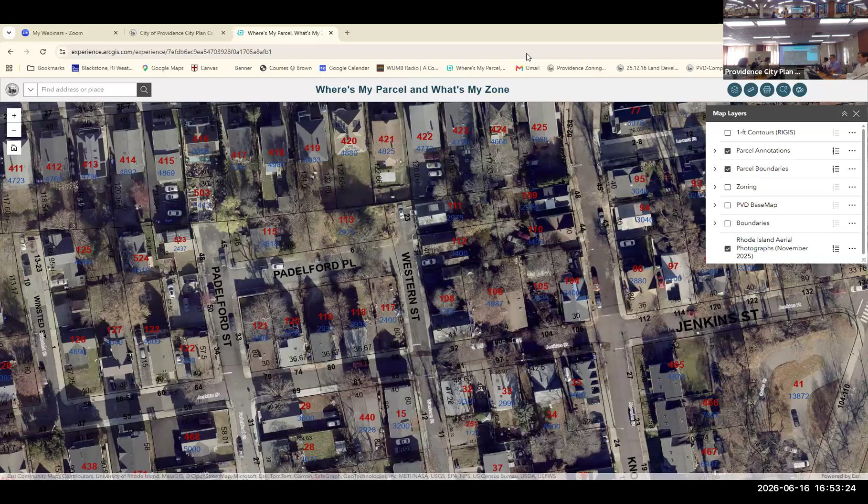Hello, thank you for your time today. My name is Sandra Slonim and I live at 23 Western Street, been there a while. The northern terminus dead ends literally in front of my house, my front door. I also own lot 113 right across from me. I'm asking the city to abandon the northern terminus so that I can have legal access to a parking space for whatever's left of my lifetime here, because anybody can go and park there and then I can't get into my house. So, that's it. Any questions?

It's funny, Google Maps has Padelford Place as Western Street also, but it just curves around. Yes, that's incorrect.

Simon was so very helpful with me. Those two lots, where it says Padelford Place, 50 years ago were removed and Padelford Place became a street. However, the update didn't make it to the tax assessor's map. Well, the good news is that's the tax assessor's map, and that static map will be updated after the end of the tax year.

Thanks to Nate Urso, the signs are up. I just want to say that everyone I encountered at City Hall and in the planning department, from Joe Angelino to Nate Urso for the signs, to Lev, to Craig Hockman, to my city council rep Sue Andebois, were so helpful with this. I'm sincerely appreciative. That's really great. We don't often hear that, so that's good to hear. Yes, yes.

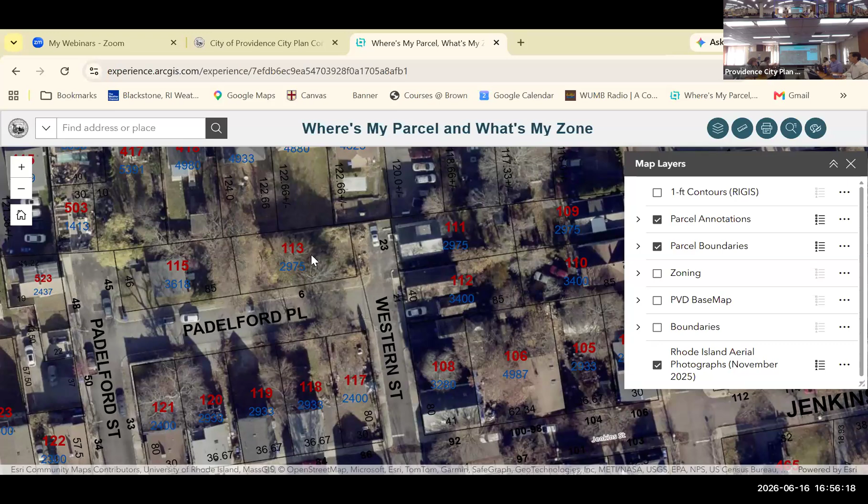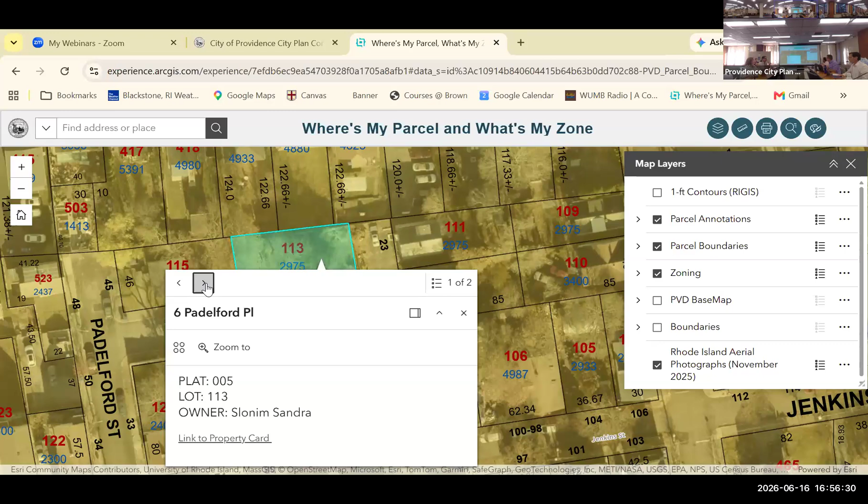And that's an R3, I believe this is R3 zoning here. And you have spoken with the owner of lot 113, correct? That is me, yourself. Oh, it's you, so you have no problem getting the authorization to do this from the other landowner.

No problem with that. The other one is a very unique situation, the one above it. There is a lot to the north, but that clearly has street access, the southern terminus of Duncan Avenue. Have you had any contact with that? Yes, that's my neighbor Yale, and I've told him what I'm doing.

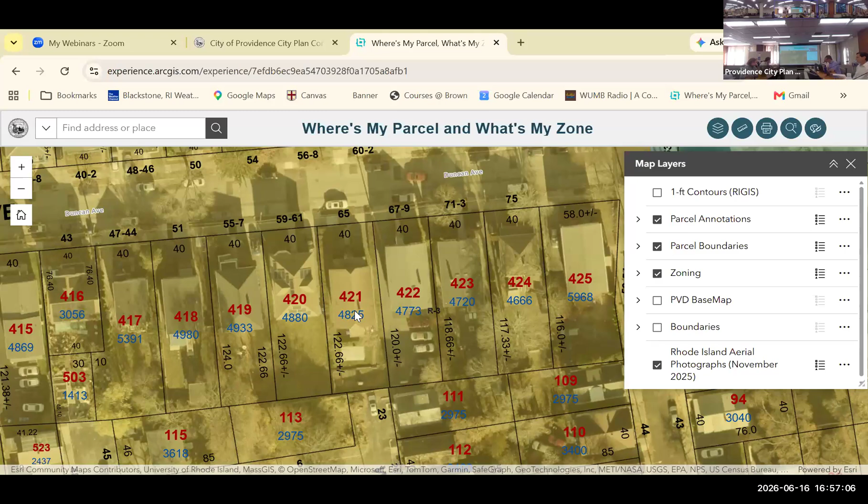Any other questions for the applicant? Let's hear the staff report. Commissioners, as has been discussed, this portion of Western Street is only useful for providing access to property owned by the petitioner, and not necessarily for accessing different parts of the city. So therefore, we feel that abandoning it would not necessarily go against the public interest.

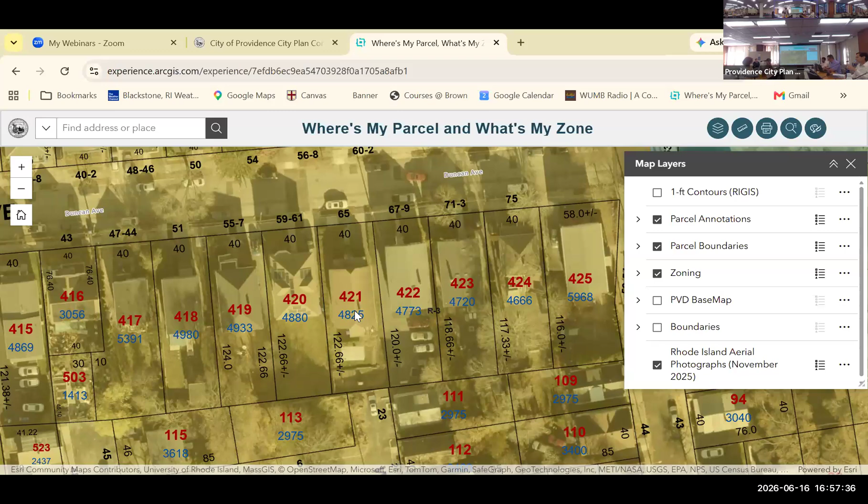We don't foresee negative impact in terms of affecting future plans, as well as we don't foresee a negative impact on the health and welfare of the community based on this abandonment. The petitioner does own land to the east and west of the abandonment area, but we haven't heard any objections from the owner of 65 Duncan Avenue, which was to the north.

No physical or legal access will be denied as a result of this abandonment. We don't know if there are any public services or facilities that need to be protected, and the applicant will need to grant easements as necessary, and they have provided a petition and plan as required. So based on that, we recommend that you make a positive recommendation to the Committee on Public Works to approve the abandonment subject to these conditions: that all landowners agree to the abandonment, that the petitioner apply for an administrative subdivision to merge the abandoned portion of the street with their property prior to appearing before the city council, and that they grant any easements as necessary.

Thank you, Joanne. We will now open up to public comment for this agenda item, agenda item number 2, referral number 3617, abandonment of a portion of Western Street. If there's anyone here in the physical room who would like to speak, please make your way up to the podium next to our table. If there's anyone joining us virtually, please raise your virtual hand or press star 9 if calling in. Nobody. Seeing no one, we will close the public comment portion of this agenda item.

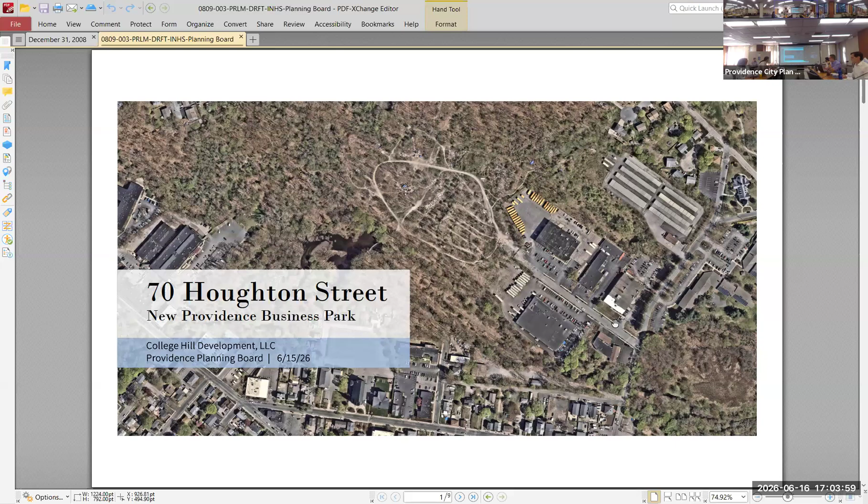If everyone's familiar with the site, it's the location of the American Tourister Mill. The street you see here is Houghton Street, which was improved by the city about 5 or 6 years ago. That roadway was improved to provide access to our site, and you'll see the usual features on the north and south side of that street, so sidewalks, street trees. Utilities were also stubbed into the middle of that street to serve this property. There are multiple parcels here that have been in or out of the previous iterations of the plan, but the highlighted area in red is what we're here to talk about today.

Existing conditions, it's previously cleared, about 9 acres. It was the mill, and since then it's been used by the city as storage. There are some stockpiles out there, material that was stockpiled when they did the CSO project. It's zoned MU 75, mixed use 75, which allows various uses, warehouse being one of them.

So it's a mixed zone, allowing residential, industrial, commercial at 75 feet. From the zoning, we are asking for a waiver for the survey plan, but we're not asking for any use or dimensional relief or anything like that.

Excuse me, Brandon, I just want to clarify here, you mentioned the city. This piece of property has been owned by the Providence Redevelopment Agency for decades, and there have been attempts to find a development partner for this site since before I started working for the city in 2000. I just thought I'd give a little context behind that when Brandon talks about the city.

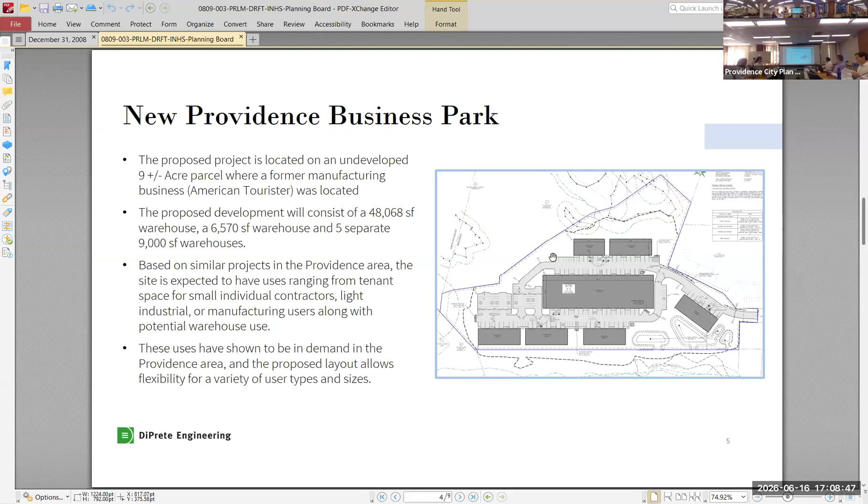I'm going to zoom in because on this view you can see in the bottom right is where we're providing our stormwater treatment. We're doing a fairly typical basin, a water quality infiltration basin, so kind of a 3-cell system.

You can see on the right there, sediment forebay, the water comes in. Then we have smaller infiltration basins for the water quality storms, and a larger basin for the peak storms. Everything flows off to the bottom of this view, to the south.

If you're looking at the plans, that blue line is the property line, but this parcel to the south is also owned by the PRA of the city, so we've been coordinating. That's part of the application, so we have the ability to work on that site. It works out well because a lot of that area is disturbed previously and in rough shape.

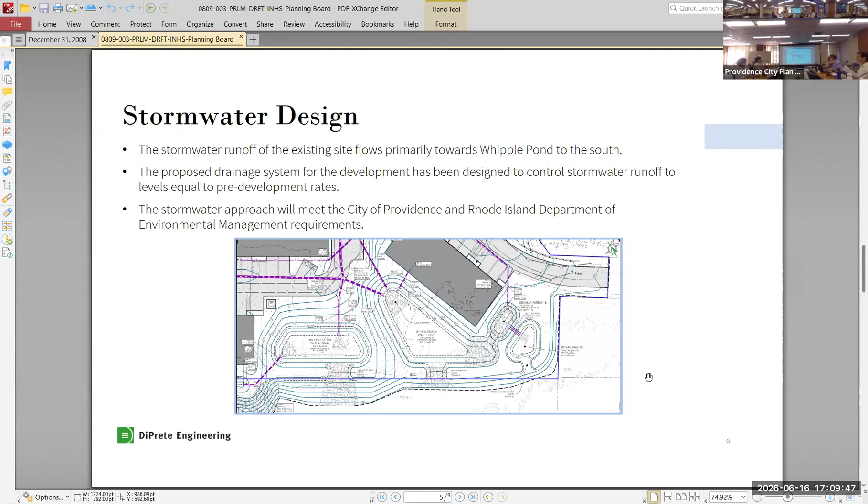So hand in hand with this work will allow us to restore some of that area adjacent to the wetland buffer. I mentioned this earlier, but utility design is pretty standard. This will have sewer with a pump station that serves the whole site, gravitating out to the end of Houghton Street.

With these being warehouse uses, we're not anticipating high volume of flow, so there'd be a pump station, then there's an existing force main at the end of Houghton that we tie into. We pick it up there and install our own private pump station. Water, sewer, gas, electric all run right to the end of Houghton in the city for that work, so it's pretty simple to bring into the site.

We've reviewed, and we're going through those processes now. We talked to the city engineer and Providence Water, and we're seeing this initial concept and wrapping up the reviews for those.

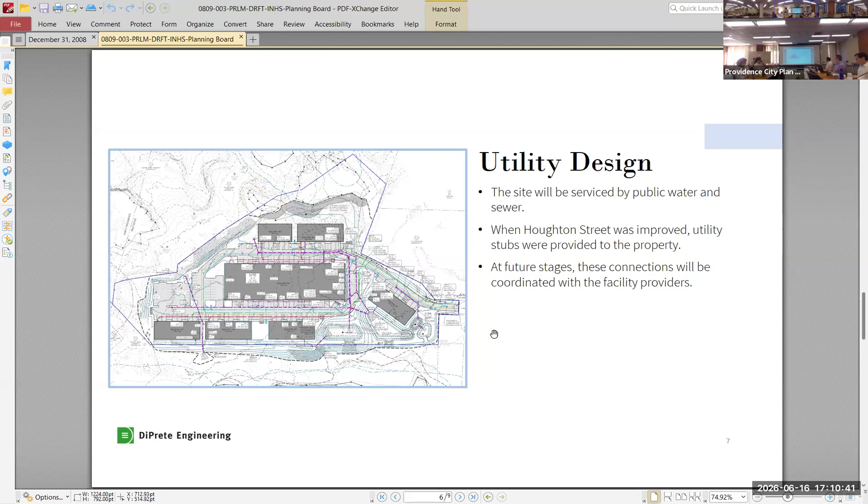For landscape design, we're meeting the city's requirement for shade trees and for parking field. It's kind of an isolated site at the end of the cul-de-sac, with woods to the north, south, and west. So we're providing the required parking lot shade requirements, and some screening, mostly for the abutters to the northeast.

But pretty typical street trees, and anticipating possibly some lower plantings around the buildings. At the top you'll see some wetland buffer planting — these are two of the on-site wetlands I mentioned, so we're working with DEM to restore that buffer along with those plantings.

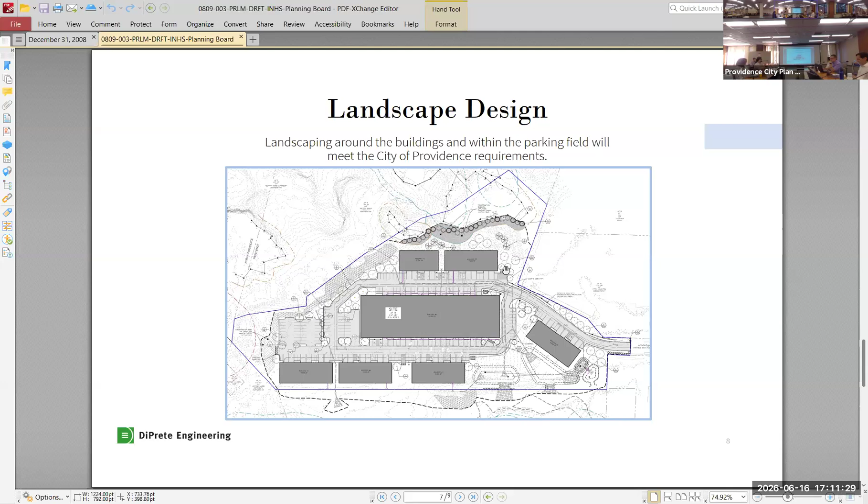I think the last two slides are just the lighting design we provided. For the most part, I think that might be 3 or 4 light poles, but mostly this would be lit by building lighting along the front and sides of the buildings. With those, especially in areas where the buildings are facing each other, it should be safely lit just from the building-mounted lighting.

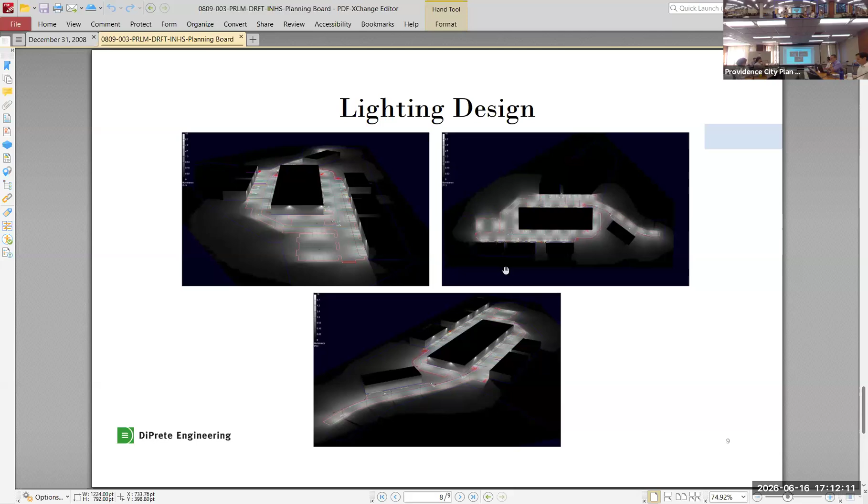And then last, just some conceptual imagery of what these buildings would typically look like. You can see the top views and the bottom left are that kind of lower scale warehouse use I've been talking about — a smaller building of 9,000 and 6,000 square feet. Pretty typical, just overhead doors and main doors, and a smart meter on the front.

And then a larger building with a bit more loading, which the rendering shows with some tractor trailers, but it doesn't have any loading docks or anything that would service trucks that large. So it would be maybe a slightly larger scale warehouse, with the ability — going back to the site plan — it's basically twice as wide as the other building, so it lends that same flexibility, broken up into different tenants.

So that's pretty much the presentation, and what we're here for. I have Rich Ricari from the developer in the back if you have any questions for him. Otherwise, he's here to answer any questions you may have.

Okay, commissioners, any questions for the applicant?

I guess I'll kick it off.

The intent is to rent these out to smaller spaces, not to one end user, even that middle big building is meant to be carved out. It has the ability for somebody, if there was somebody looking for 48,000 square feet, but historically we haven't seen that market for this site, so it allows that flexibility. For warehousing, light manufacturing, those types of uses that are allowed on the zoning.

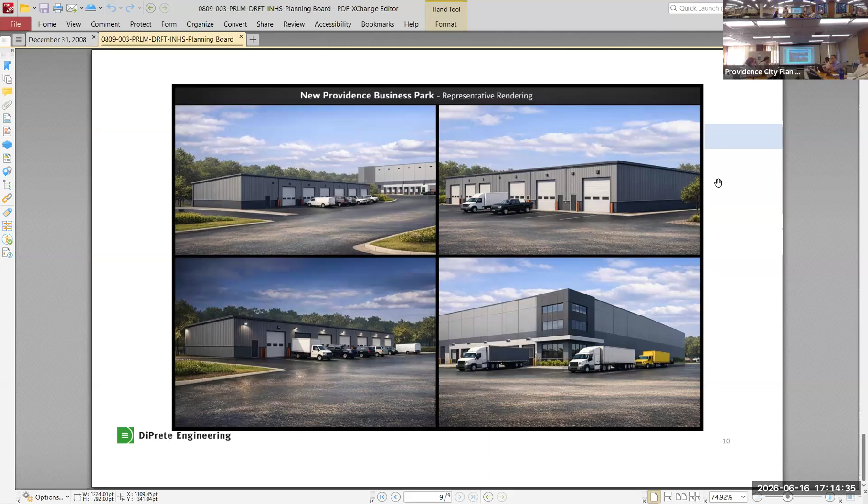Questions about access on the road, is that how you get in? We went through this conversation with the city engineer about truck access. It's not a great spot to get to with big trucks, that's why we gravitated towards a smaller scale, but if you're coming from 95, the Admiral Street approach is a little bit better, then come up Veazie Street, I know there's a school over there, but you could also come off the branch exit and come west on Branch, north up Veazie, and then right into the site.

It's not even really a 2-lane street, it's not marked down the center, it's pretty tight, definitely a smaller scale. If you look at the neighboring uses, Goodwill to the south brings tractor trailer trucks in there, I'm guessing not very frequently, and then you have the bus company on the north, so that traffic is making its way to this area. But we're anticipating typically what you see here are smaller companies or self-employed, some warehousing uses, resellers and things like that.

So it's not gonna be storage. No, not a storage facility, and not self-storage, not like the adjacent property. When I say storage, like there's one near me in Massachusetts - Auto Parts International has space, they serve stores, that's kind of where they have their warehousing aspect of their stores, things like that. We're not necessarily running distribution out of it, and it doesn't have the loading dock set up.

We're looking at Veazie Street right now, and it is a 2-lane road. The pavement markings may be worn, but it is a full 2-lane. I'm at the Goodwill location for Business Employment Services - it's pretty good, but yeah, Veazie can be tough.

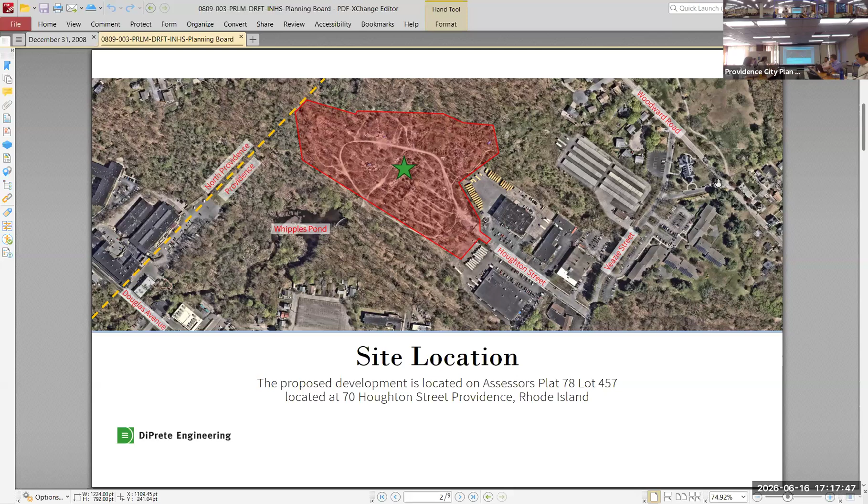And there's no other exit possible from the lot? No, that would serve what we're doing. There's no, it's landlocked all on this side, this is all the river, this is owned by - I think the City of Providence owns a piece back here - but there's no other access.

That's over in this area, if you can see my cursor, that's over in this area here.

I'll just add that I think this is the closest the PRA has been to finding a bona fide developer for this site, and this seems to be the most practical solution.

Okay, any other questions for the applicant or hear a staff report? All right, John, take it away.

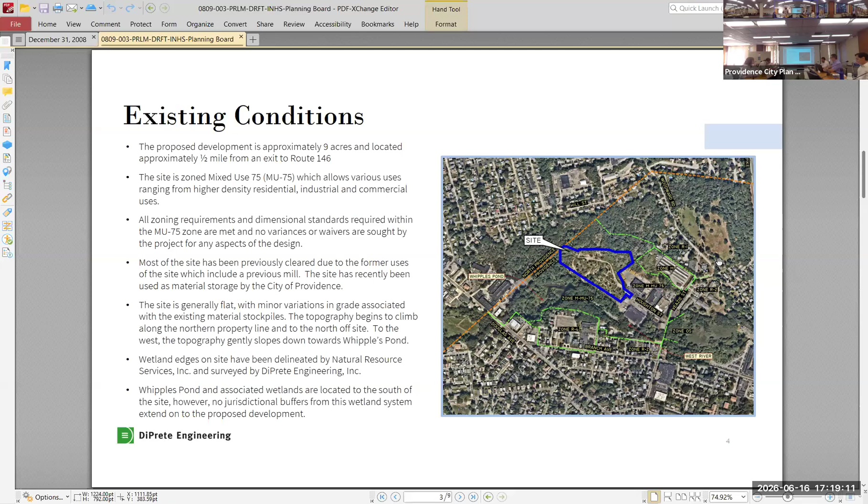Sure, thanks Mr. Chair. The applicant already spoke about the items we reviewed for the preliminary plan, like design, landscaping, management, parking and traffic, so we can jump directly into the waiver. In this case, it's a request for a waiver from submission of a site survey. As they mentioned, they've faced some difficulties getting it, and we feel it would be in the interest of good planning practice to grant this waiver, as it would allow the applicant to develop the survey and move on with the approval process. So we recommend that you take a vote to grant the waiver from submission of the survey with the condition that it be submitted with the final plan.

Moving on, we find this development consistent with the comprehensive plan, given that this area falls under the business mixed-use development designation, intended to foster growth of commercial and industrial uses. This use would be suited to that description. The industrial general warehouse and commercial uses proposed are permitted in the MU-75 zone. They conform to the dimensional design regulations of the zone, as well as parking, landscaping, and lighting requirements. We don't foresee a negative environmental impact. There are no apparent physical constraints that would impact development of the property, and adequate vehicular and pedestrian access will be provided from Houghton Street. Based on that, we recommend you approve the preliminary plan with the condition that the drainage plan be subject to the city engineer's approval.

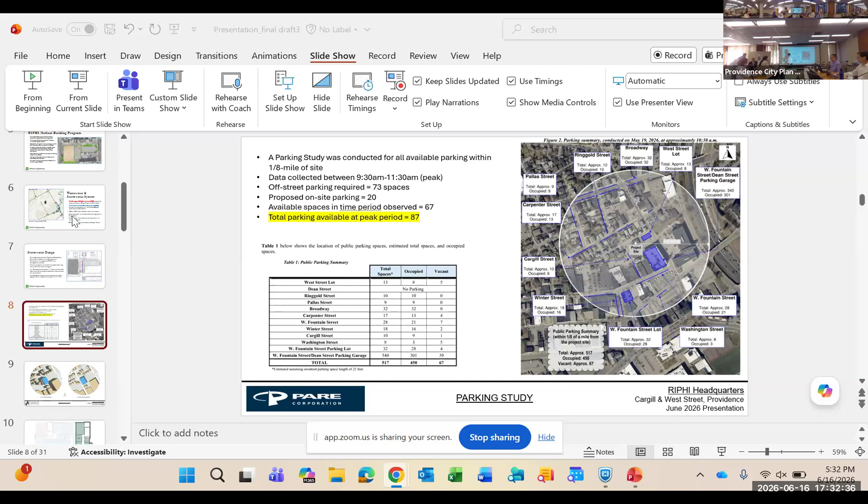Could you please state your full name for the record? Phil Cusco, C-U-S-C-O. Phil, could you briefly tell the board, at my request, did you prepare a traffic and specifically a parking analysis of the surrounding area to the proposed development? Yes. Can you share with the board, in brief plain language, your findings of that report, and then answer any questions the board may have? Our study encompassed a 1/8 mile radius around the site, with the site being at the center point of that circle.

We studied during peak times, which is between 9:30 and 11:30 a.m. Then we evaluated the on-street and off-street parking, and 73 spaces are required for the site. But we discovered that there were available at that time during that peak, 87 spaces, which exceeds what the site would generate. Under the code - and the code basically is the parking study handbook prepared by the Institute of Transportation Engineers - that was used as a basis for the study.

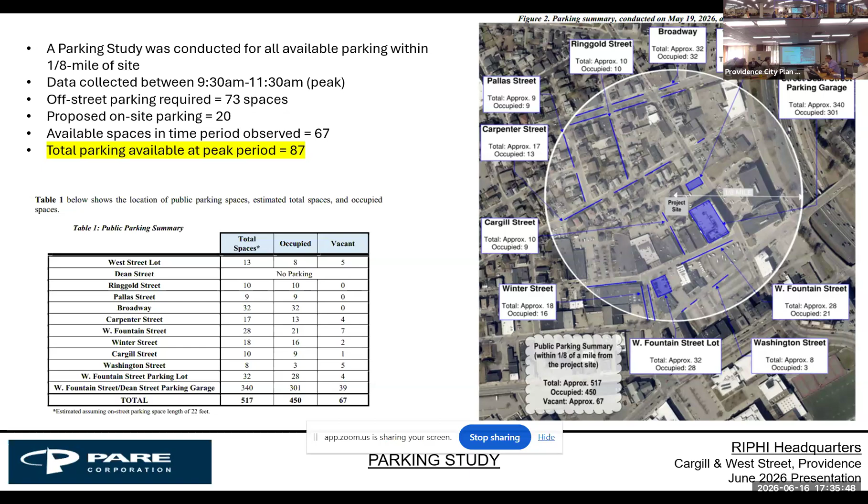Isn't this right next to the public safety building garage, right across the street from or adjacent to it? Right, I've parked there before. Isn't that parking available? That's part of the availability. Have you had any discussions with the city about that? Yes, we discussed that with the city. And what are their thoughts? It's available - it's available anywhere in the public, including this proposed use as well.

Also, the top floor of that development right now, the parking garage is used for confiscated vehicles. It is my understanding the city is looking to relocate that, and there will be even more parking available at some future point. The top floor of parking is restricted right now, and that will also become available, increasing more parking available as well.

In addition, the existing site was also counted as part of the study, so there were 13 vehicles there, so there will be even more above and beyond this amount. So that was all counted as part of the traffic and parking analysis.

Okay, any other questions on traffic and parking? Does anybody have staff park there? Or how are you going to handle wayfinding compliance and stuff? The staff is included as part of the whole parking calculation, so they would most likely park in the garage area, and the other spaces would be for patrons to the facility.

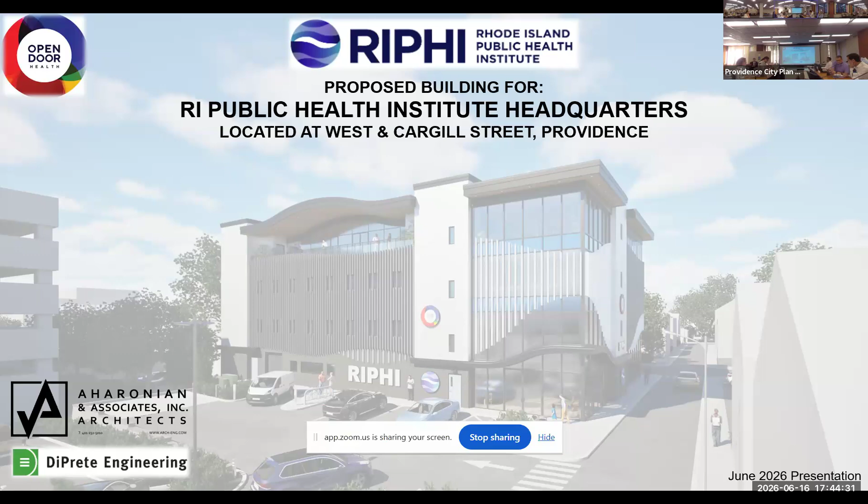Chris, you're a licensed professional engineer in the state of Rhode Island, correct? Correct. And you have been and continue to be the project engineer for this particular proposal, is that correct? Yes. Could you please briefly take the board through a general journey of the property and answer any questions they may have in terms of utilities, water, sewer, access, et cetera, and some of the engineering that you have done to date on this project.

Certainly. I'll draw your attention to the slideshow. The project is in the center of the circle that you see in the Federal Hill section of Providence. It's between Broadway and Westminster Street and just west of I-95.

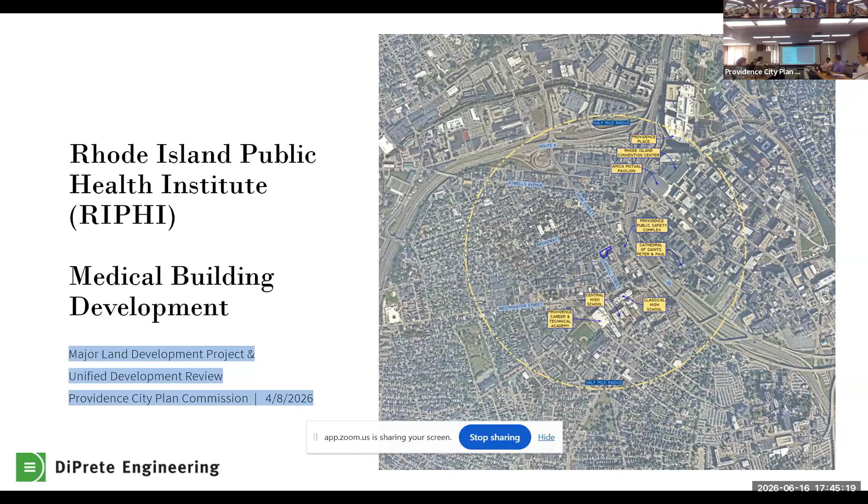This is a close-up of the site itself. Bob Azar mentioned the public safety garage; that is located in the lower right-hand corner of the plan. The plan is sited due north. So the project itself includes Assessor's Plat 29, lots 550 and lot 108. Those front on Dean Street, West Street, and Cargill Street.

As has been noted, the site is zoned commercial, C2, as are the direct abutters to the south. That includes the garage. There is an alleyway between the garage and the site, informally known as Bowditch Place, but it is a lot owned by the Providence Redevelopment Agency, as is the garage. There are two other private owners: there's a parking lot on Dean Street below our project, and then another business to the south of where the proposed building is going.

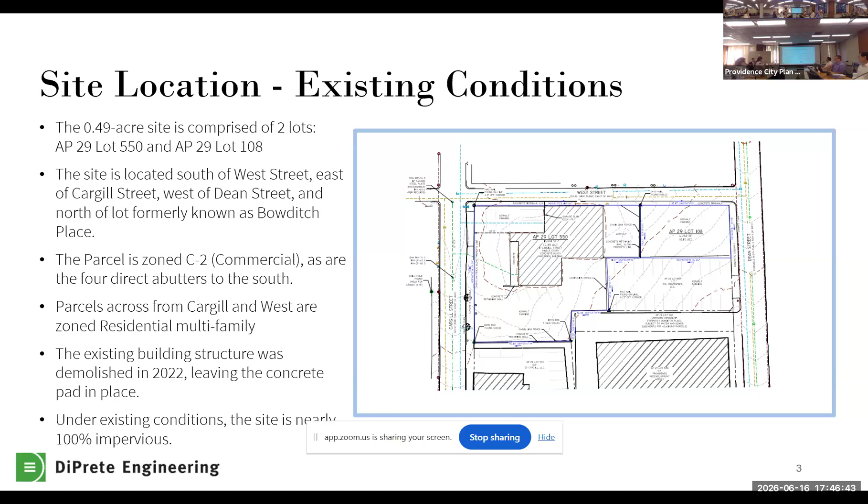This is our existing conditions plan. It shows the condition when the survey was done and includes an existing building that has since been demolished. But at the time that building existed, the entire lot was 100% impervious between roof and parking lot. For safety reasons, in 2022, that building was demolished, and I have a quick view. You can see to the left is the current state. What was left in place of the building is the concrete pad. That structure in back is the parking garage.

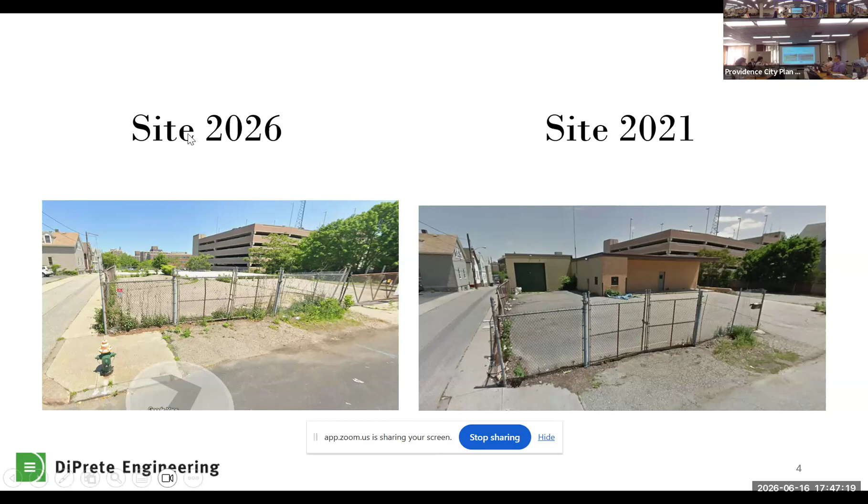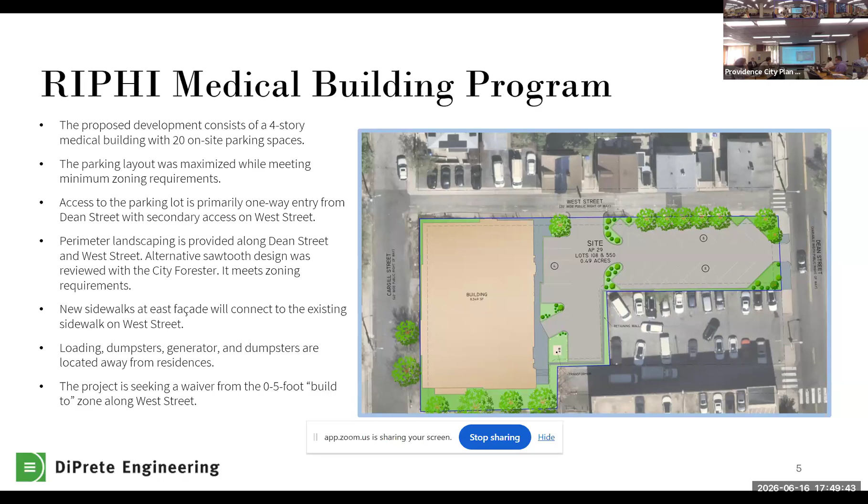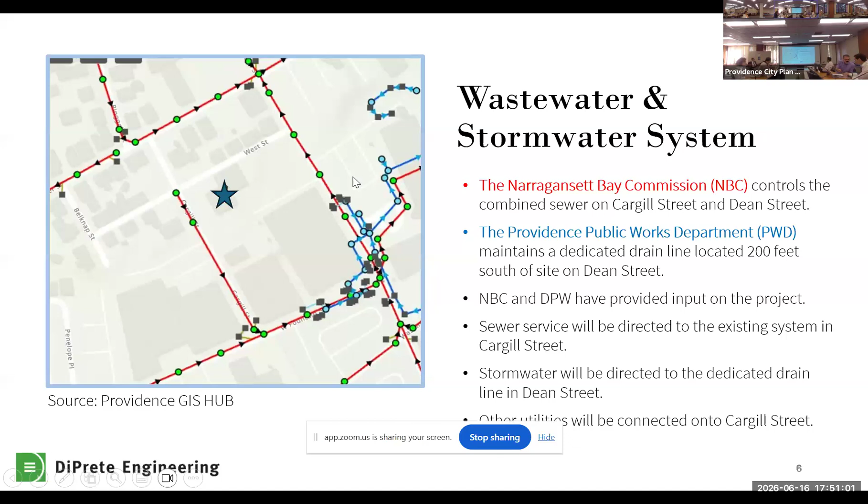Basically, we're going from a site that's 100% impervious to a site with significant landscaping, so overall we have a decrease in peak runoff. We have accommodated a small increase because we are taking the roof to Dean, where some of that roof—or some of the parking lot—would have gone to Cargill. So we have a small detention system in the top parking lot.

The rest of the utilities—electric, gas—would likely come from Cargill Street, since there's not much on West Street. If there are any technical questions for the engineer, she'd be willing to answer them. If not, I'll call my final witness, the architect team.

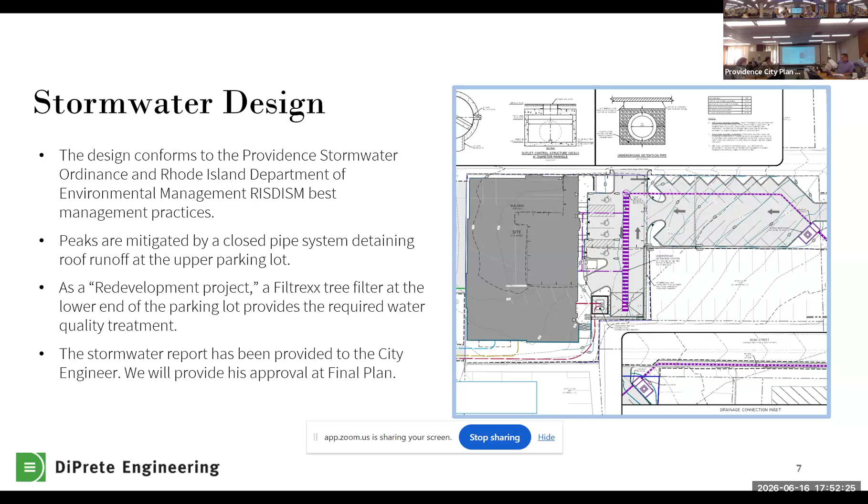Any questions for the professional? Any civil questions from the commission? I'm good, thank you very much.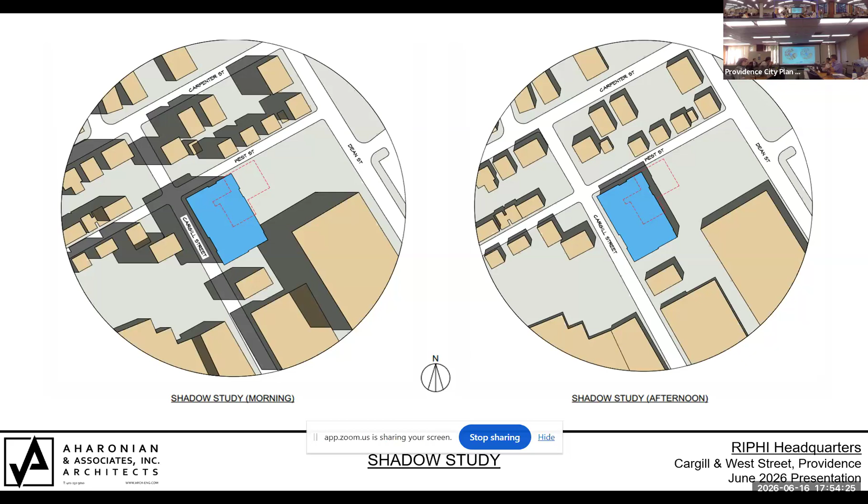The red dashed line you see up here is the existing building, so you can see where that existing building footprint is and where we took it back towards Cargill Street, exposing the other houses on West Street and giving them a better view of the landscape and parking lot area than what they had when the building was there.

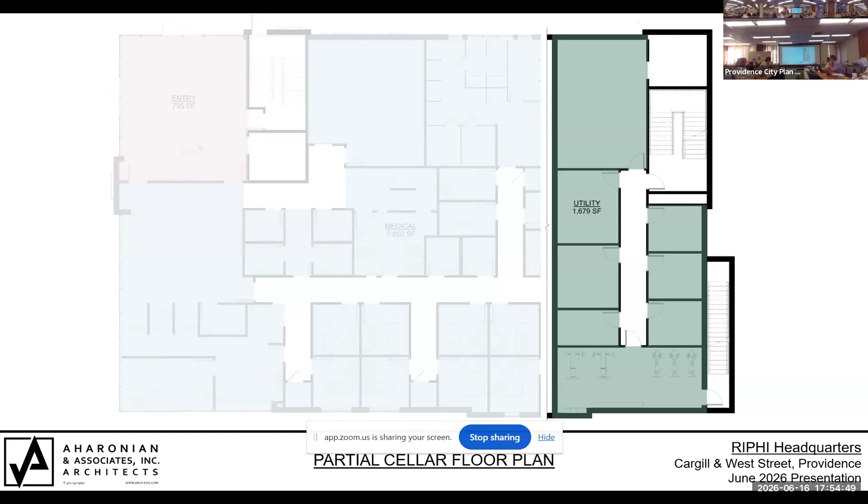The next few slides are the floor plans, just to give you an idea of the uses for each floor. We have about a quarter of the floor plan that's just going to be in the cellar for utilities, shown in that greenish blue color there. The rest of the first floor is ghosted out so you can see the portion of the building that cellar actually takes up.

This is the first floor here. The pink area in the corner is facing the parking lot on West Street, so that's our central entry point. All patrons will come into the same general area for safety and security reasons. So any walking would come off of West Street, and anybody coming from the parking areas would come right up at the top part of that plan.

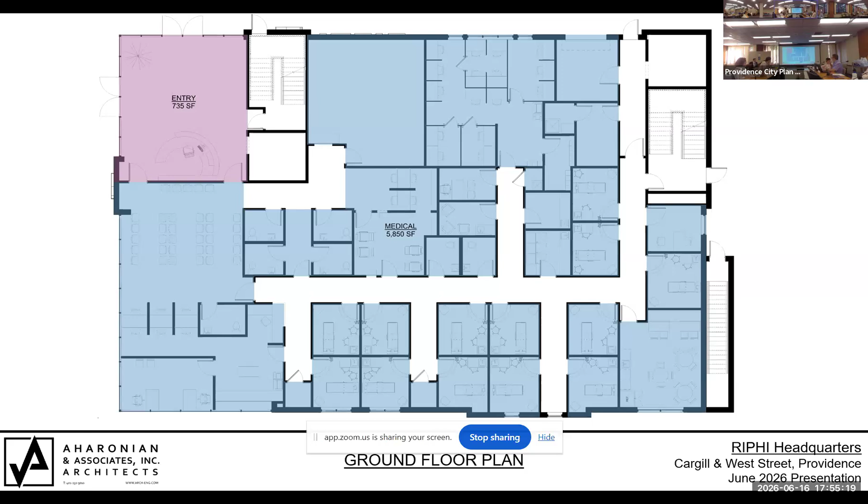The blue areas there are all medical, so the first floor is an entirely medical use. The second floor is also entirely medical. You'll notice that the lobby is actually two stories, we'll get to that when we get to the exterior elevations. That's what that white space is in the corner there, because it's a two-story entrance lobby.

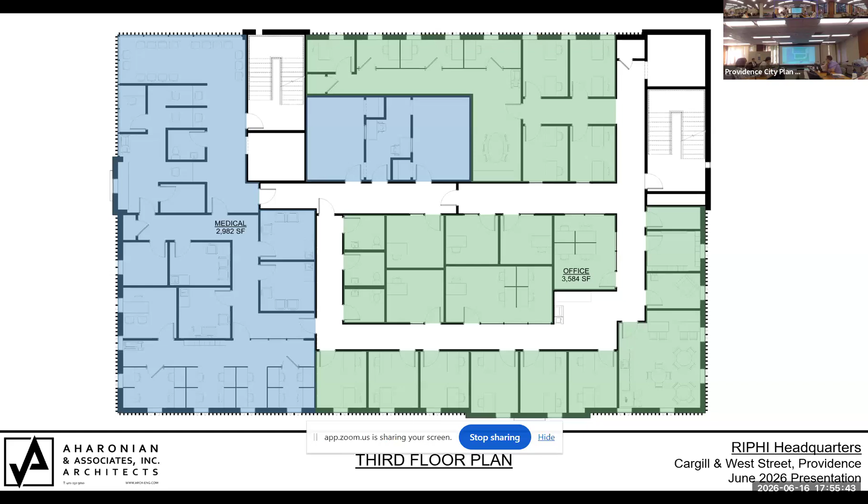The third floor is going to be about a third medical, and then starts with the office use in green there, for the general headquarters of their staff. And then finally, the fourth floor is all offices, conference rooms, being able to promote their business and what they do.

This slide is just showing you the roof plan that shows the pieces of the roof that come up above the 50-foot roof height, just so you can see basically the stair towers and elevators.

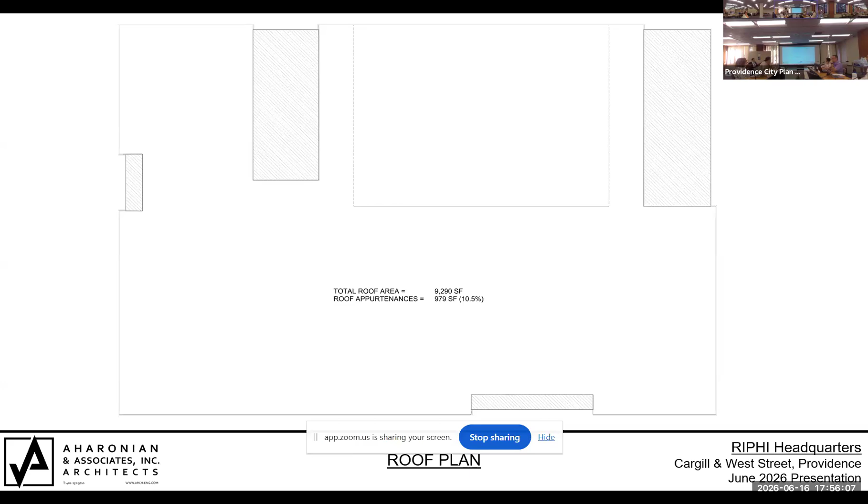This is the facade facing Dean Street, so this is our main facade. I wanted to go over materials here. There's a lot of curtain wall storefront. That right side corner is essentially the two-story lobby at the bottom, and then conference rooms at the top. So it's meant to be more of a visual aesthetic.

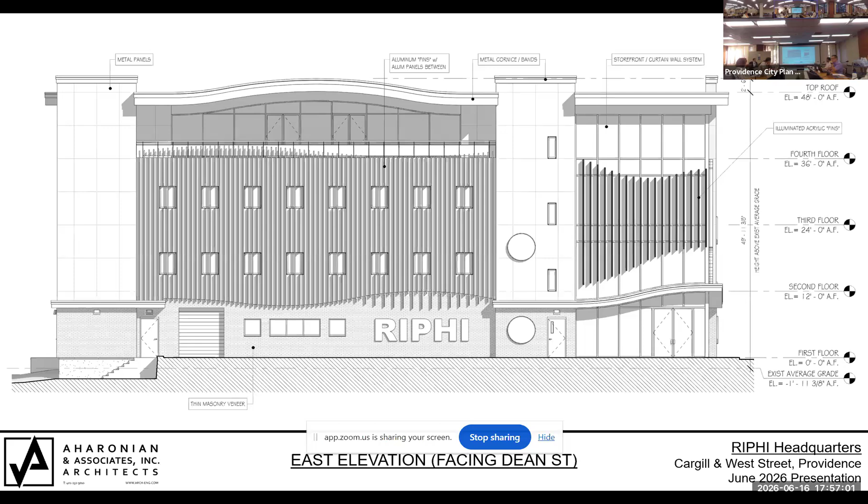The stair towers have metal panels. The lower first floor is going to be a brick facade. There are windows throughout the building, as you'll see on the other sides as well. What we've done is create aluminum fins that will provide some privacy to those windows, because they'll stick out and allow sunlight to still come into those clinical areas. So it provides some privacy and allows sunlight to come in.

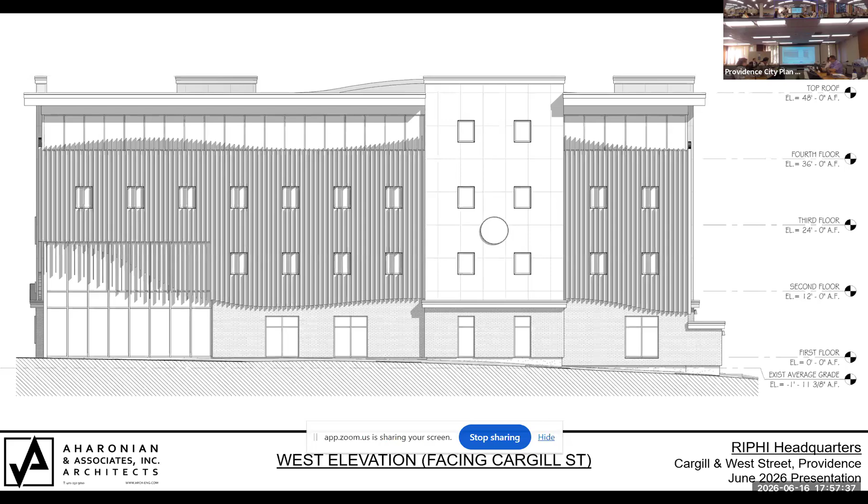This side is facing Cargill Street, so a little bit less glazing. We did increase some of the glazing at the ground floor to enhance pedestrian access to the building from previous designs. We have the fins creating kind of a wave feature throughout the building to give it an aesthetic that's going throughout the entire building.

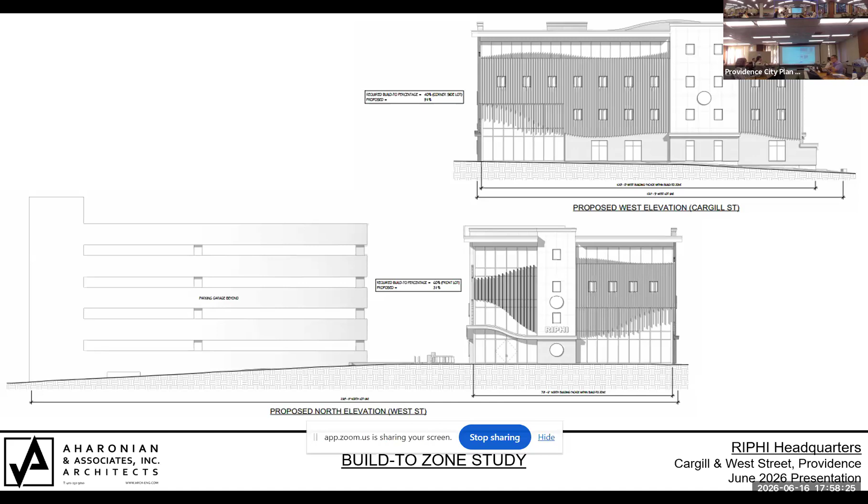This side here is just giving you an idea of how tall the building is in comparison to the parking garage that exists today. But what it's really telling you is the build-to zone, and why we over meet it on Cargill Street, but on West Street, because of the configuration of the lot, we're only at about 30%. That's the waiver we're seeking, just to give you a visual of what that looks like, which also opens up a lot of, going back to the site, the houses on West Street.

Going into the renders, this is a before and after view from Dean Street. You can kind of see how we're trying to clean up that parking lot and give it a little more landscaping. You can see the scale of the building itself in the back and how you would see it from Dean Street.

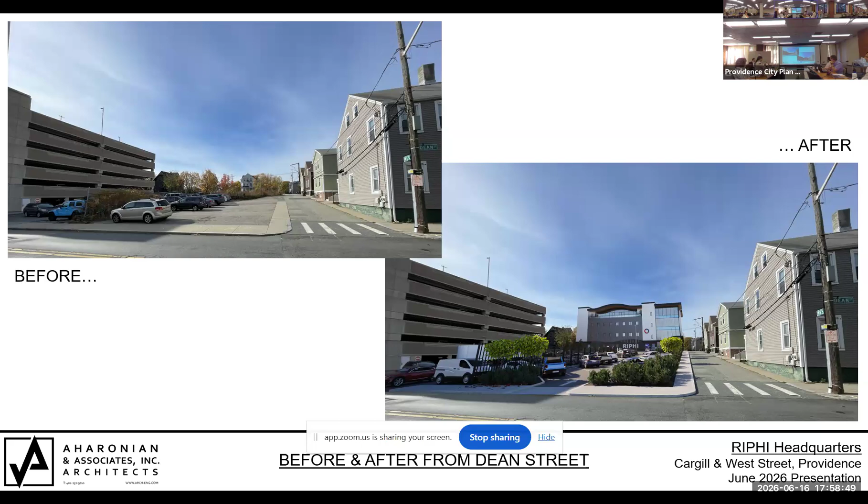This is a corner coming a little bit closer to the building, showing the parking lot on Dean Street, with West Street on the right side. That's the front corner of the building. You can see some of the colors we're choosing for the materials, the whites with the grays and the charcoal colored brick.

I do want to note that the storefront does look a little bit reflective. It is not intended to be reflective at all, it's just a function of the render. For windows, we are proposing interior window treatments to help with privacy in the medical parts of the building.

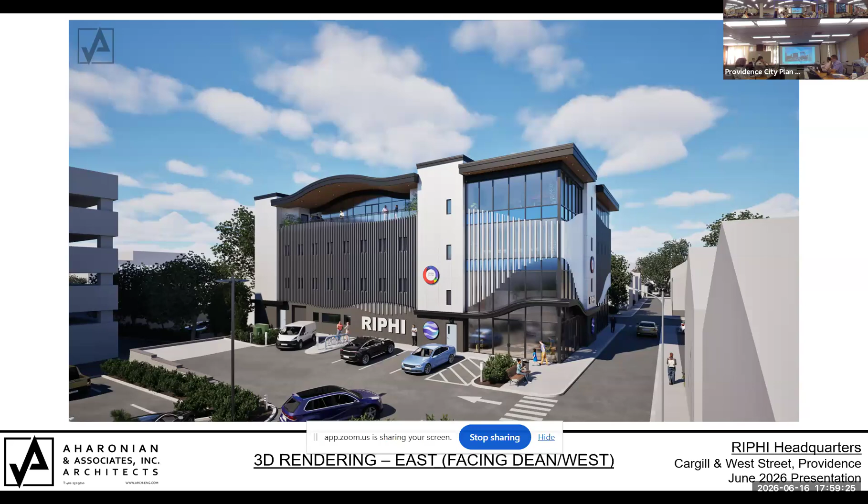This is the view coming down Cargill Street, West Street to your left. You can see the entrance on the left side of the building there. And this right corner is also creating a wave of glass on that side as well.

This is the view coming down Cargill Street, going towards West Street on the other side. You can kind of see the side on the right, that doesn't face any of the streets.

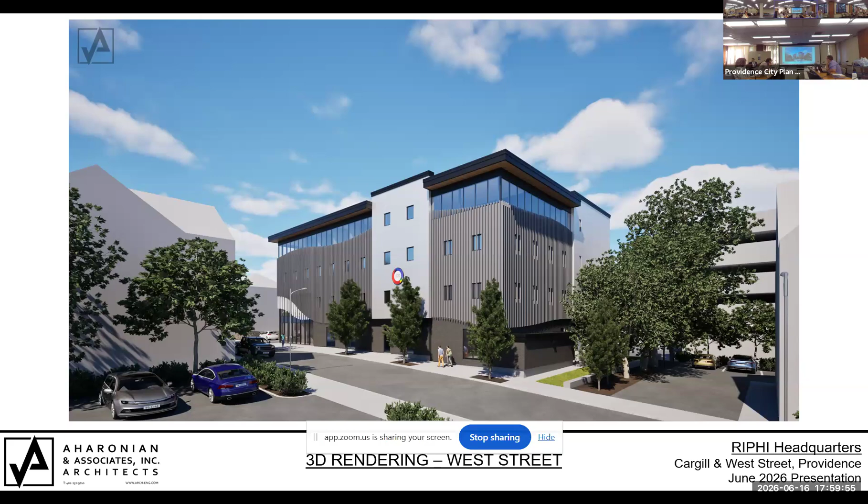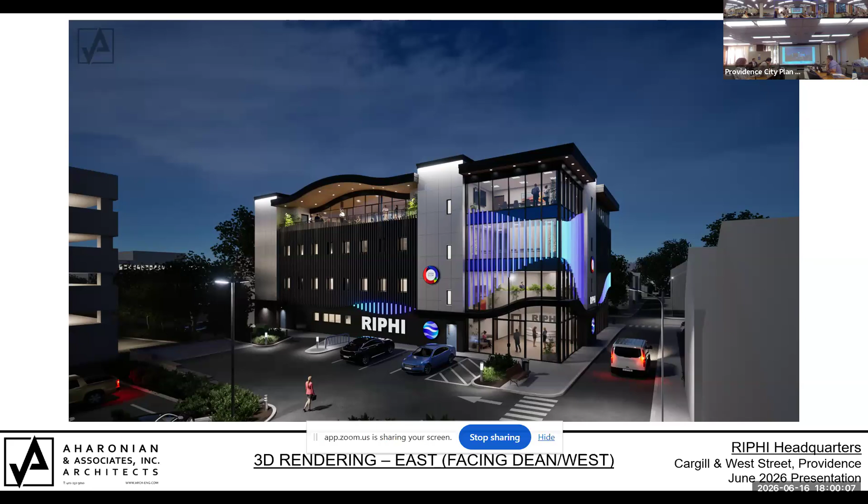I just wanted to get into lighting. We have a couple renders and then the lighting photometric that show some of the lighter fins are going to actually be an acrylic, milky white fin that can be backlit at night. It's a soft glow, not meant to project lighting, but we wanted to show you what that would look like on the two sides where we have it.

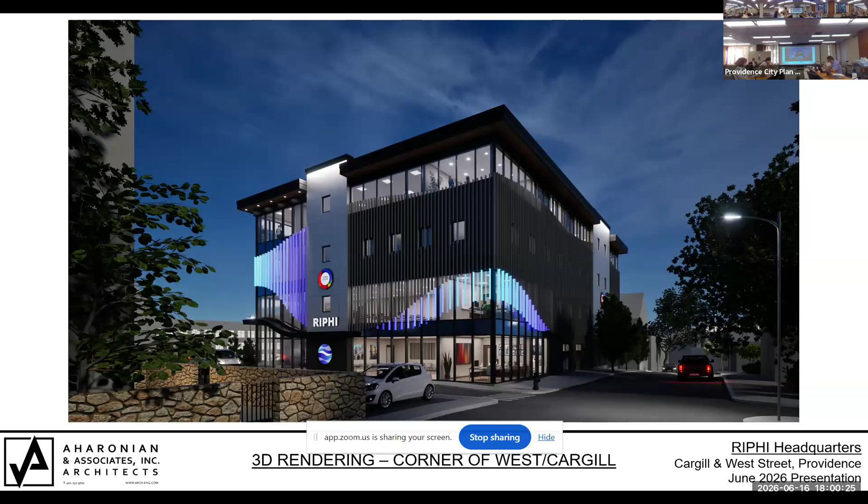And that's all I have. Thank you. Any questions for the architect?

Couple questions. The signage you show in there, you're not requesting any zoning relief, so I'm assuming that all the signage meets the zoning code? Yes, that's our understanding. The lighting that you're showing on this, is that intended to stay on all night, or certain hours?

Probably certain hours. We haven't dictated the hours, probably only when they're open, or if they're having events. It's not going to be on at 2 o'clock in the morning or anything. Mr. Chairman, if the board wanted to make a condition of certain hours of lighting, we would certainly abide by that. All right, we'll consider that.

And just because we've come into this with other applicants, you know the definition of a cellar in our code, and you've done the calculation to make sure that this meets the definition of a cellar. Correct. That was submitted, and I have a slide on it too, but it's kind of boring. Okay, fair enough. I wanted to ask and have you testify on the record that that was such.

Commissioners, any other questions for the architect? Thank you. If there are no questions, that would conclude our presentation. Happy to have anybody subject to recall of questions of the public.

Wonderful. That concludes our presentation. Thank you. Okay, thank you. I guess let's hear the staff report on this, and it looks like there may be some people from the public who would like to speak on this item, so let's start with the staff report.

Sure, thanks Mr. Chair. Starting right up with zoning, this is a use that's permitted in the C2 zone where the site is located. The applicant also spoke about the dimensions and design of the building. Your report also includes a report on design review made by our staff planner, Chris Issei, which is a function of our updated zoning ordinance where you will be seeing these design reviews. While his findings were particularly positive, he did have some concerns about the lighting, which we did speak about.

And as far as parking goes, you did see the parking layout of the site, and they are requesting a variance for parking that we will be talking about shortly.

As far as environmental management goes, they have submitted a stormwater plan as well as an erosion and sediment control plan, which will be subject to the city engineer's review.

As they said, their landscaping plan was approved by the city forester, and it just happened today. In approving that plan, he also approved a modification to the perimeter landscape strip, which had a sawtooth design instead of a straight strip as required.